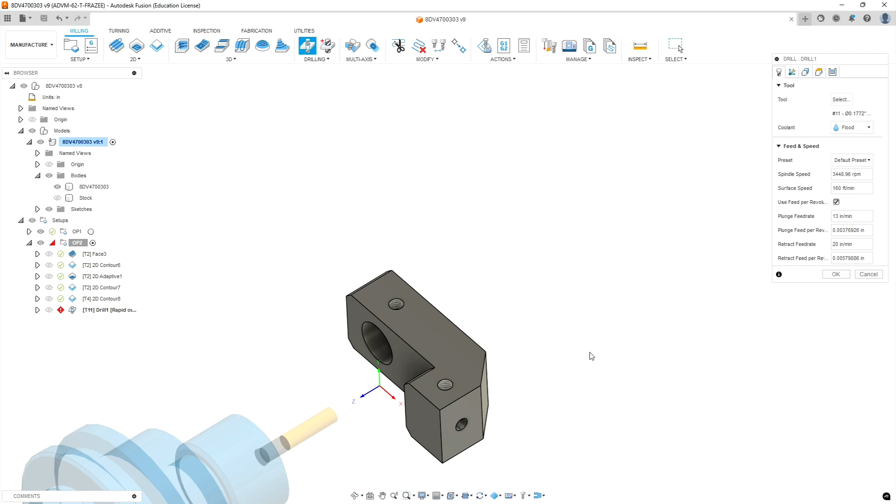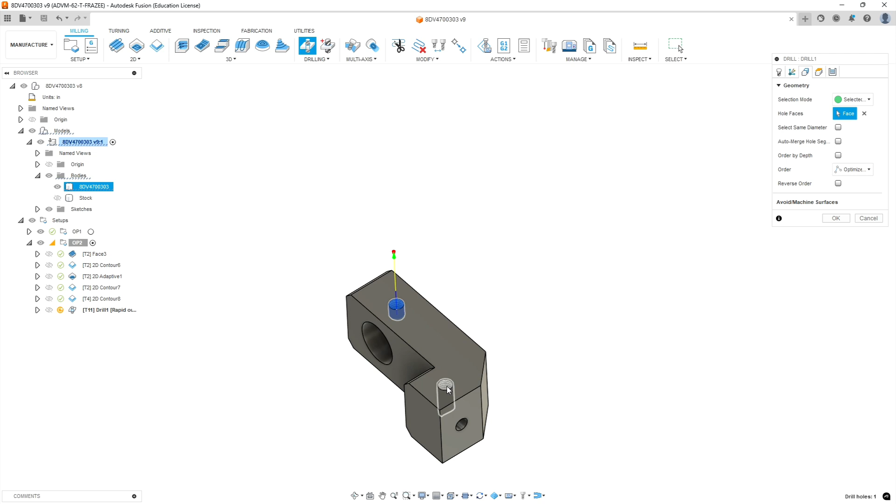We're going to select that, and then we are going to go to multi-axis, and we're going to set our tool orientation. So this is our first 5-axis move, and we're going to select our z-axis is this plane here, and our x is still to the right, so that's good. We're going to go to geometry. We're going to select our two holes. And right now it's going to default to not going deep enough on those holes. We'll put them in order by depth.

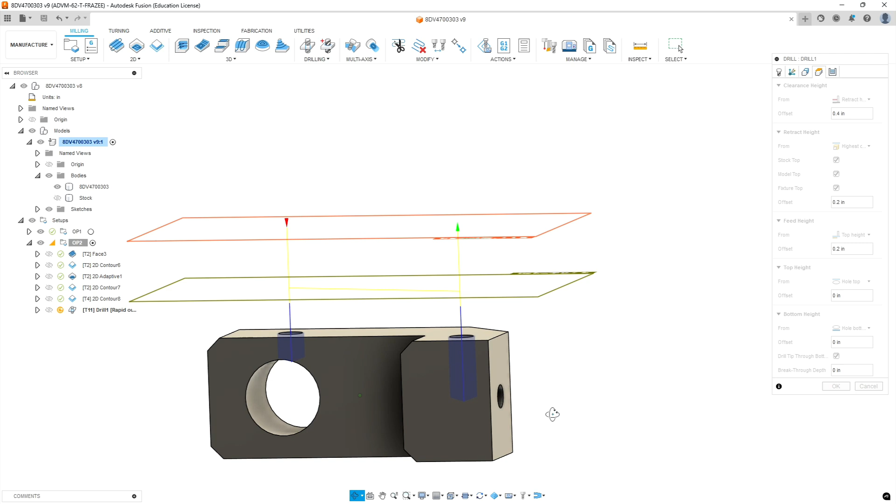We're going to go to the heights. I'm going to go ahead and leave stock as the top because we're on the side here and we do have some material there, and a little more conservative. But our hole bottom, we definitely want to break through so that the tip goes through. And then we need to go a little bit deeper to make sure that it cuts all the way through the hole that it's going to intersect with.

Now the first few teeth on a tap don't actually cut anything. We don't want to hit bottom. We've got this breakthrough tip. We want to go a little bit farther. We're using a 10-32 thread, which means if we are going to have the drill bit go, say, 4 or 5 threads deeper, it's 1 divided by 32, since there's 32 threads in that inch space. Works out to a 32nd, and we're going to go times, just for safety, 5. Okay, so that's 156 thousandths. So on this breakthrough depth, we're going to put that number.

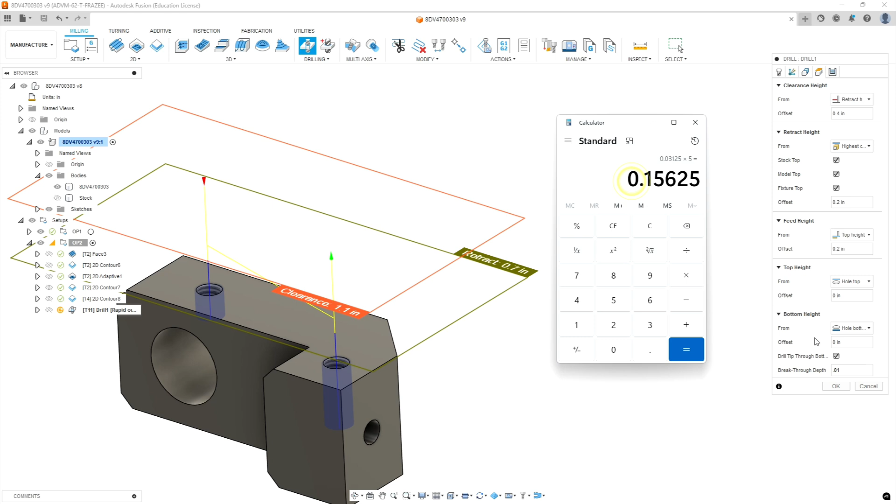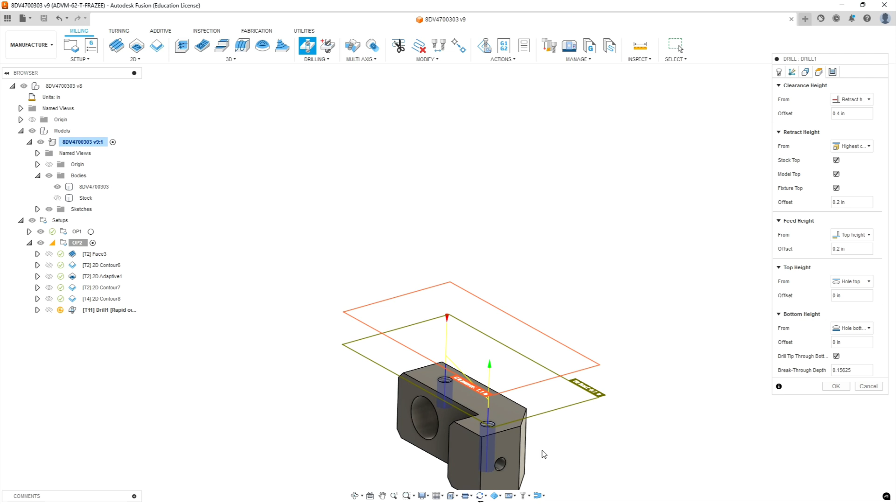Okay, so it may look a little funny on this feature because the model doesn't have the cross hole going all the way through. But unless we're going through and doing some bottoming tapping and have already cut this hole coming in from the side, we just have to cut deeper. Okay, so that isn't going to be fully threaded. That is just the clearance for the bottom of the hole.

Now we're going to go over to cycle. We are going to do the deep drilling cycle, and I've had a few questions on why we're doing this. Just because it's soft material doesn't mean you can plunge straight in. If you plunge straight in aluminum, it does what's called galling. Galling is where the aluminum smashes against aluminum and almost re-welds to itself. So you want to have these short pecks with a fast retract that pulls the chip out of the hole and flings it off.

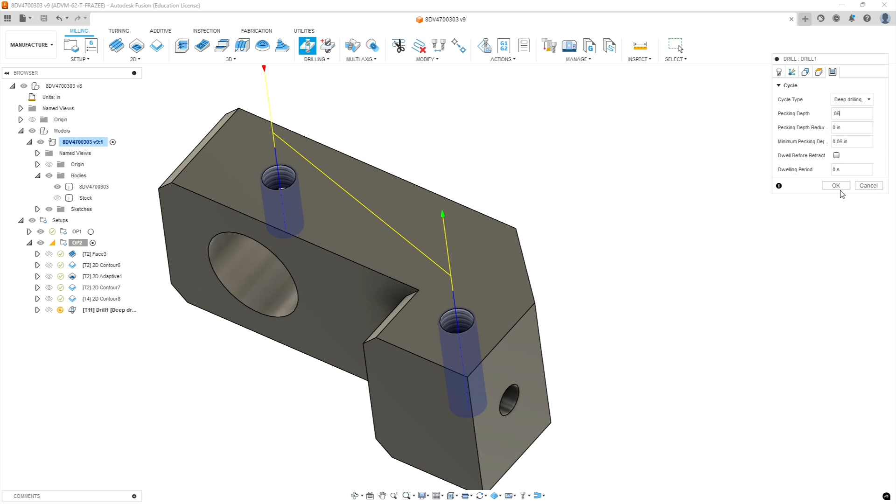So that's why we use this deep drilling cycle even if we're not going very deep. Current pecks are set at default at 44 thousandths. Let's go 60 on that. And then we don't need any dwells or anything, so we're going to leave that all at default there. Let's hit OK.

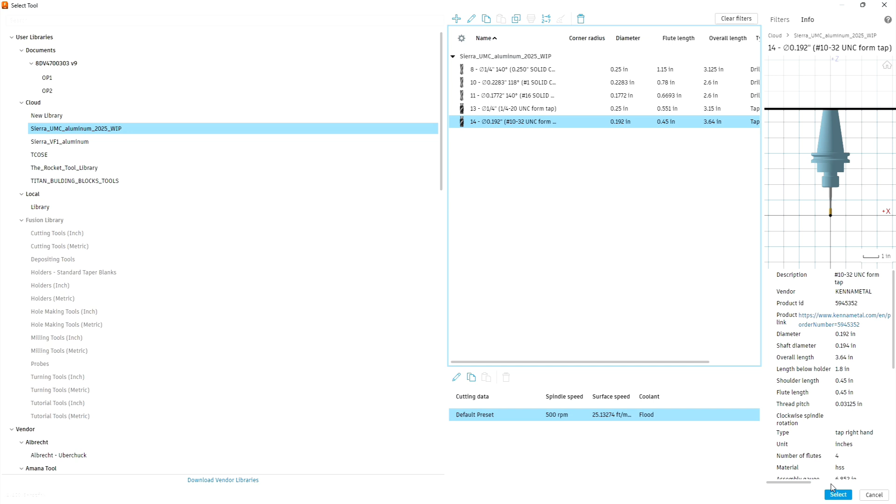Okay, so we're going to go to drilling. We're going to select from our UMC library the 10-32 tap, which should be tool number 14. All right, we're going to select our tool orientation, face, and x-axis. We're going to select our two holes. And then on our heights, we're going to leave everything at default except for this hole bottom.

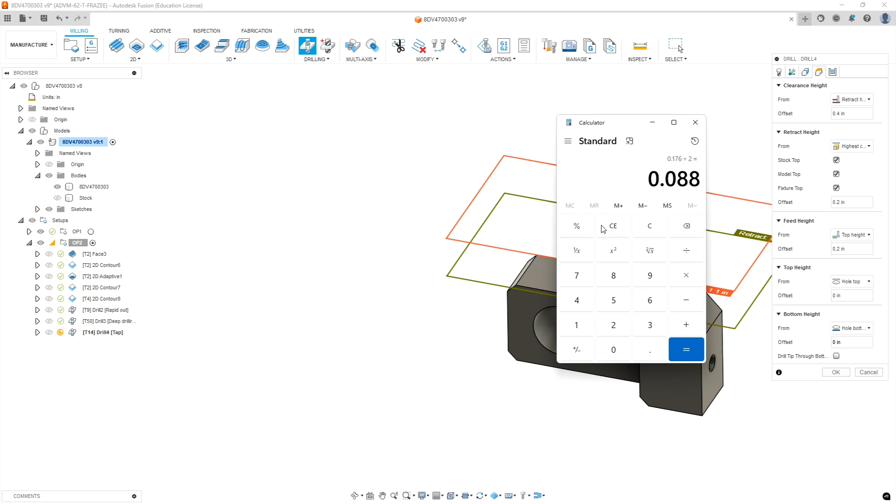We're going to go negative, let's go 4 thread pitches. So remember, it's a 32nd. So 1 divided by 32, which is a 32nd. We're going to go times 4 this time, which is an 1/8 inch deeper, 0.125. And we need to make sure that's a negative number, so it goes deeper. And that'll make sure we get a fully formed thread.

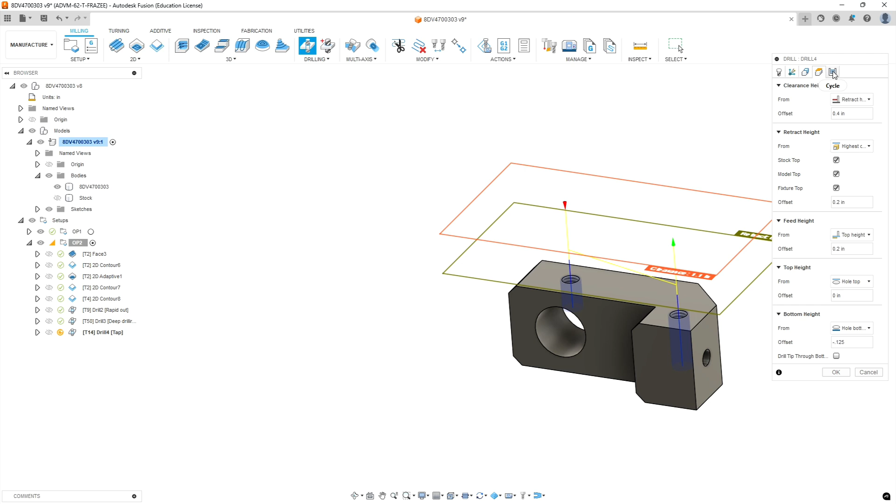Now we go to our cycle. We're going to leave that alone and hit OK. Okay, so we're at 2 threaded holes.

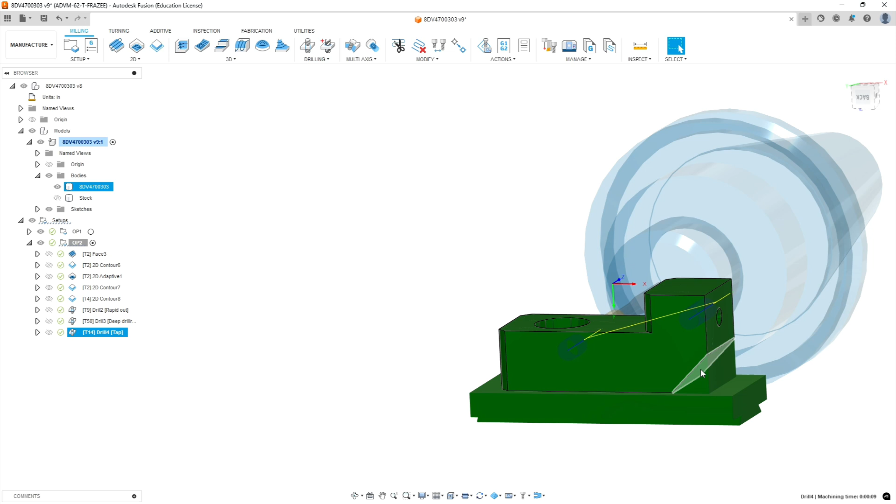Now the last feature. We're going to attempt to cut this face here on the model that I have highlighted with a 1/4 inch end mill. Okay, so we're going to go to 2D contour, and we're going to select the 1/4 inch end mill we've been using. We're going to keep the default settings here.

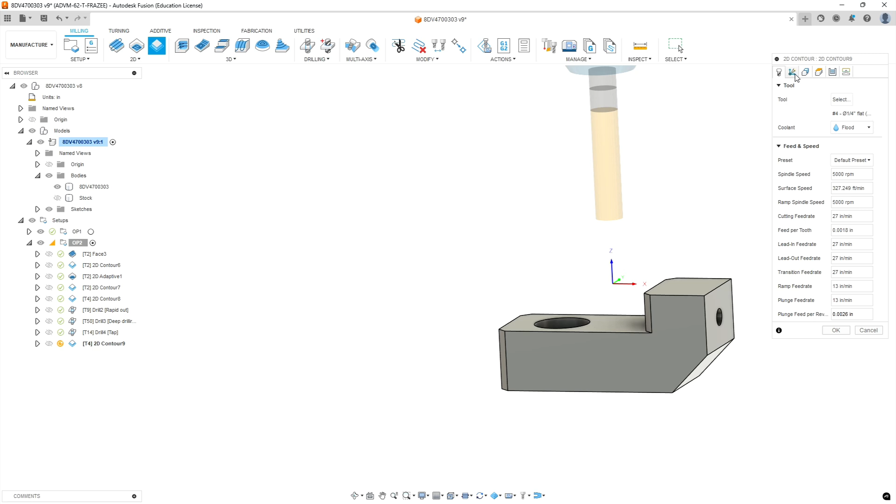On multi-axis, we're going to select the tool orientation. And what we want is for it to come in at this angle, so it'll rotate the table up, and we're going to take a cut. Okay, so what we're going to do is we're going to do a contour along this edge.

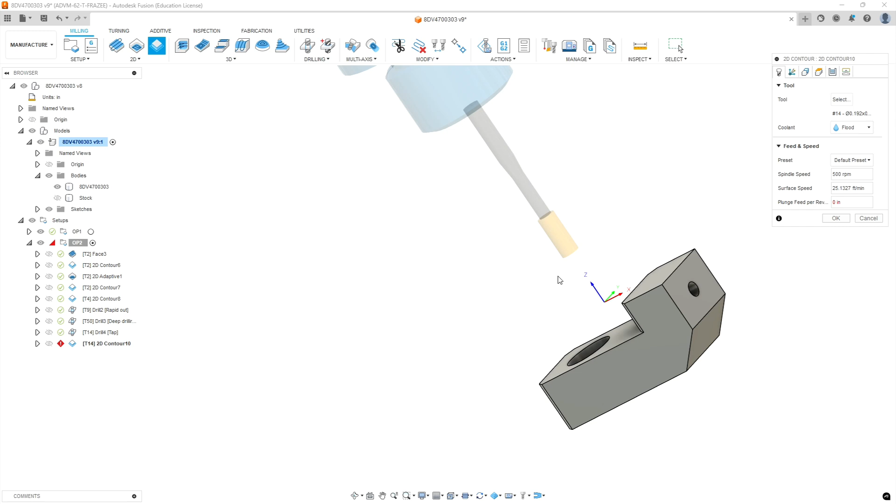So we're going to go 2D contour, and we're going to select our 1/4 inch end mill that we've been using in this document already. And we're going to go to the Axis tab. In our tool orientation, we're going to use Z and Y plane because we don't have a good X-axis plane to select on. And instead of selecting a plane, we're actually going to select the edge we want vertical.

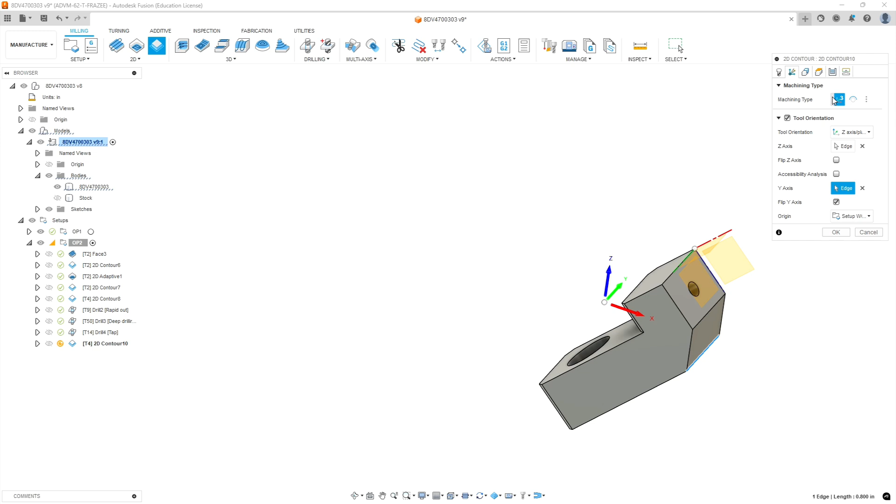And then we want to select our Y-axis, which is going to be this edge or this edge. It doesn't really matter which one. And we want to flip our Y-axis because we want it facing away from us. And then we're going to go to geometry. Now in geometry, we're going to switch to chain, but we're going to do an open chain. And we're going to select the bottom edge of our cut.

So the machine will rotate so that the spindle is normal to this line here. And then we can just do a traditional profile cut. Now we could use swarf on there. Swarf is really more intended for it to follow a curved path instead of a single straight line. But you can do this just with a 2D contour and flipping it into multi-axis mode.

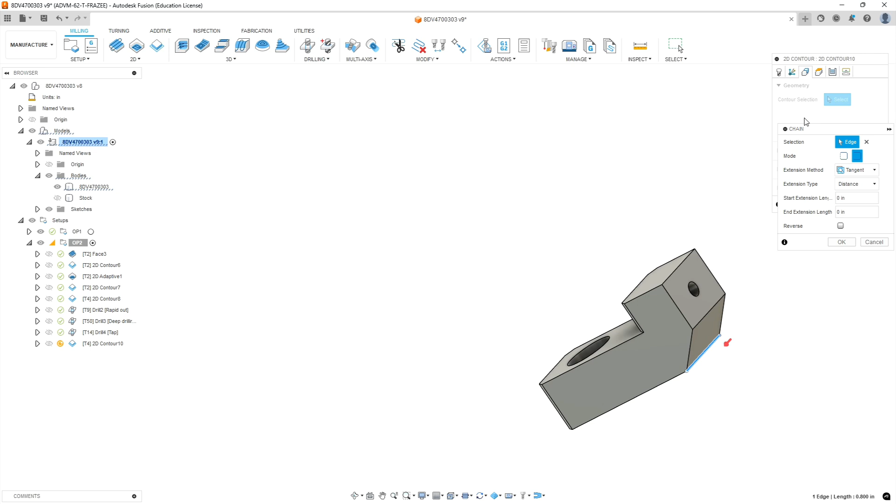And our heights, we're going to just leave everything at default. It'll calculate off our stock volume, give us some extra cushion. And then our bottom height is going to go right to that edge I selected. I'm going to go negative 0.005, it's not very much, or 5 thousandths, a little bit deeper, just to make sure we're getting past tangency.

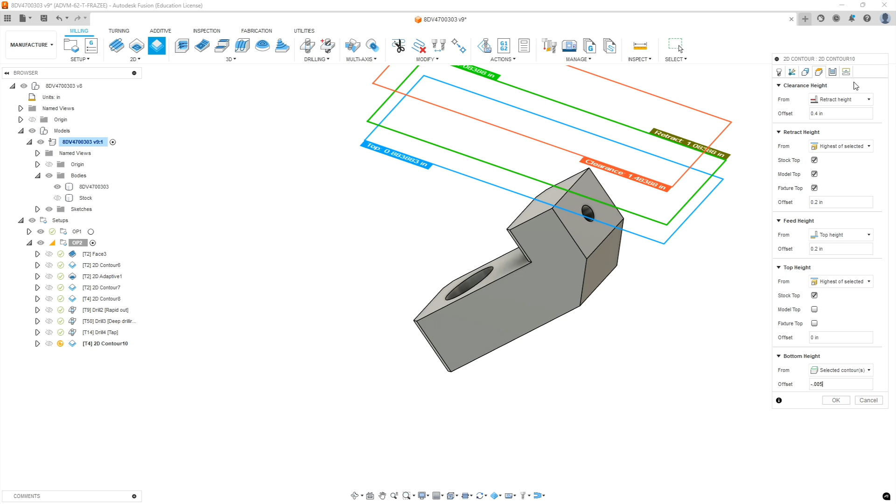All right, and then we're going to go to our passes tab. We're going to, again, change the default tolerance. We are going to do roughing passes. Let's do a maximum step over 0.125. 1 step over at the bottom. We are going to do multiple depths. Again, 0.125. We're going conservative on our cuts. And 0.01, or 10 thousandths, for finishing step down. And up here our finishing step over is going to be 0.01.

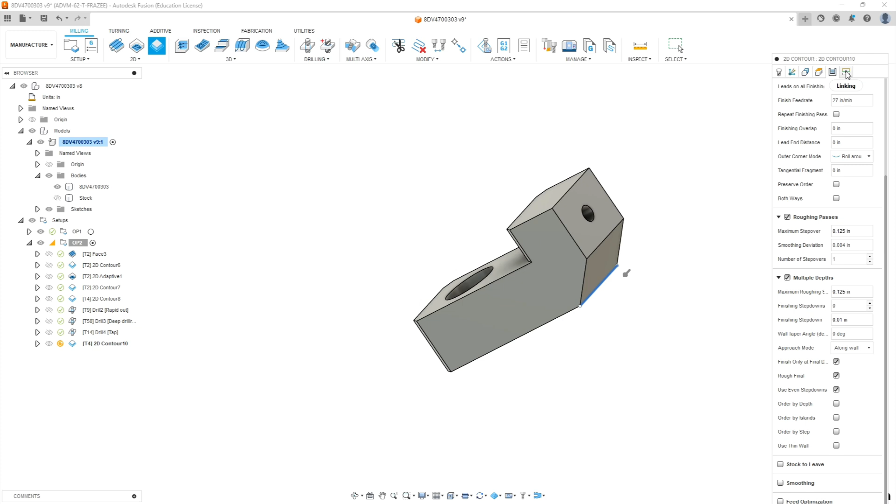We're going to rough it. We're going to finish it only at final depth. We're going to rough our final. We're going to use even step downs, and we're going to get rid of our islands. We're not going to leave any stock to leave. We don't need smoothing on. Go to linking tab.

We are going to come in at a sweep angle of 0, and our linear lead-in distance is going to be 300 thousandths, a little bit more than half the diameter. We don't want to arc in because we could hit our vise, and so we want to come in just straight. And let's get rid of our vertical lead-in radius, and let's see what we get.

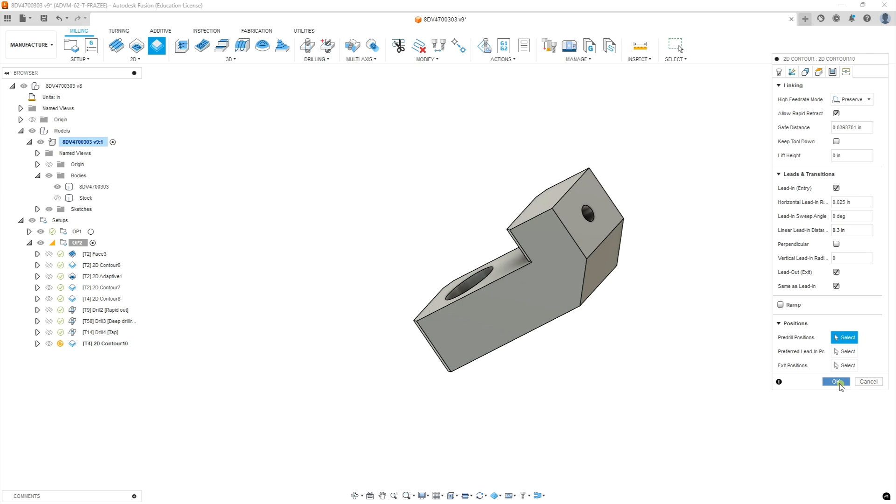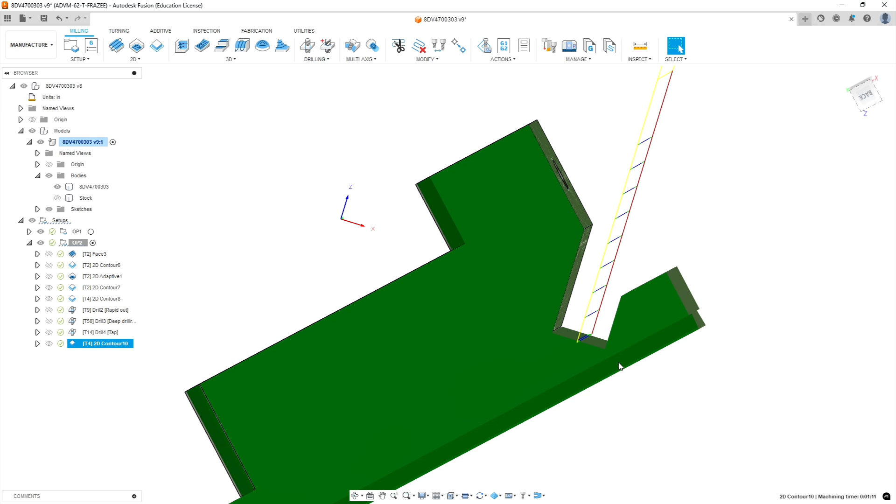Okay, so we get our cuts, and we're going to get a little V shape, and we are going to get pretty thin right here. That's why we're doing this absolutely last. And again, this is a disadvantage of using your origin on your stock, because if your stock was cut too short, this little V shape starts shifting closer and closer to your vise. Okay, we'll be running the proven program, so cross your fingers.

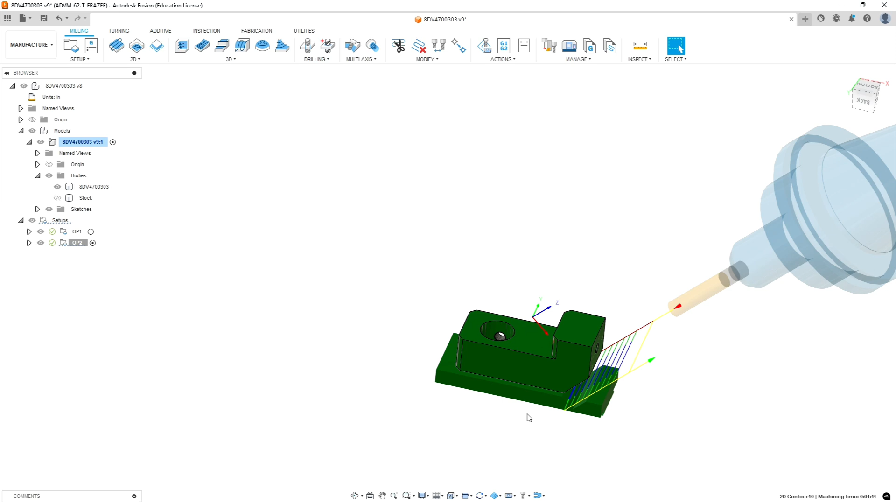All right, on the third operation for this project, you are going to figure it out. All you have to do is put it in a vise and face the back off. I am not doing a video for that, and you can handle it. So that should be the last of the operations. Again, you're going to have a third operation, which is going back to a VF1 to deck off the back. Even though I didn't do it in the video, you need to submit 3 setup sheets and 3 post-processed files.

Okay, I hope this works for you, and this is the last component I think we'll be making in the class, so you can put your assembly together with the spring and the hardware we have and the shaft, and it'll all come together, and you'll have an indicator holder you can take home.